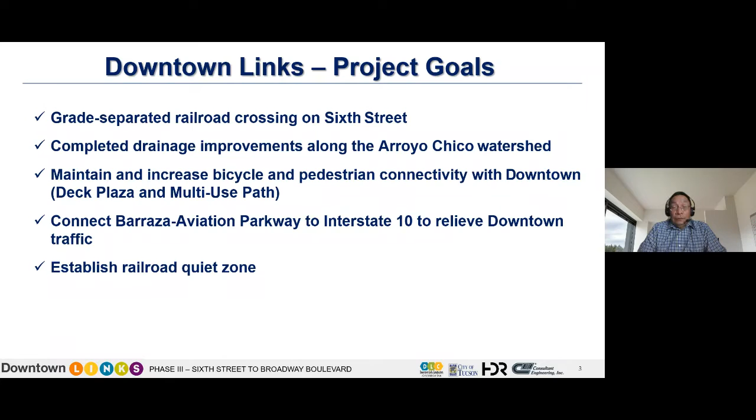maintain and increase bicycle and pedestrian connectivity with the downtown area, with the addition of a deck plaza and more multi-use paths, and then also to connect the Barraza Aviation Parkway to Interstate 10 to relieve the downtown area of traffic congestion. Also to work toward establishing a railroad quiet zone by improving several railroad crossings within the project limits.

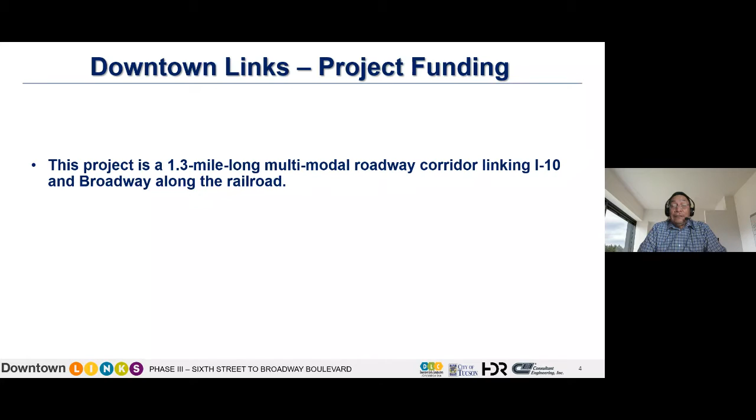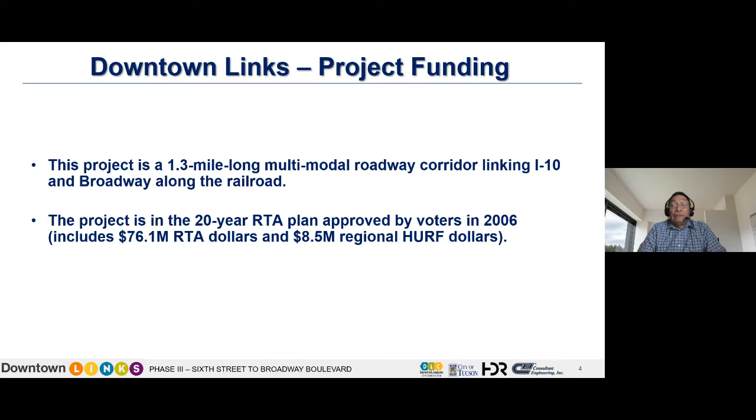Project funding. This project is a 1.3 mile multimodal roadway corridor linking I-10 and Broadway along the Union Pacific Railroad. This project is in the 20-year RTA plan approved by voters in 2006. This includes $76.1 million of RTA money and $8.5 million of regional HURF dollars. And with that, I will turn it over to our design project manager, Brent Kirkman.

Thanks, David. Yeah, HDR is very excited. We've been the city's engineering consultant for Downtown Links since its inception. And I'm going to give you just a brief summary of where we've been and where we're headed. If you were around back in 2012, that's when we completed phase 1 of Downtown Links. That was the 8th Street drainage project. That was a reconstruction of a major portion of the Arroyo Chico box culvert that goes through the 4th Avenue and 8th Street area just off of downtown.

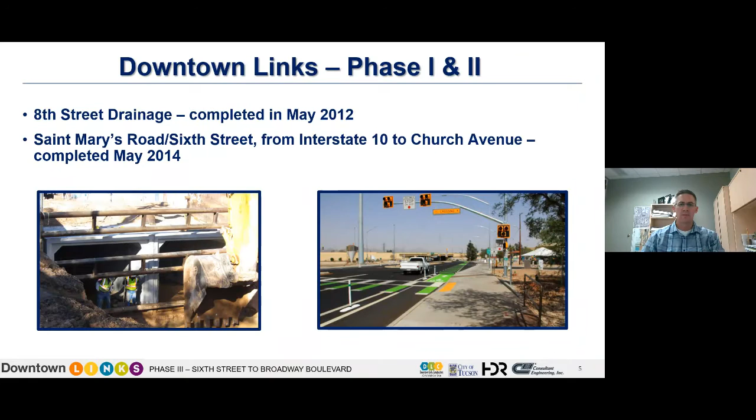Phase 2 was St. Mary's Road 6th Street, and that was really from I-10 down to Church Avenue. That was completed in 2014, and that added a median, added big separated bike lanes, some more drainage improvements, but that was phase 2 of the project. Where we're at now is construction of phase 3, and here's just a brief synopsis of those elements that you'll see constructed with this phase of the project.

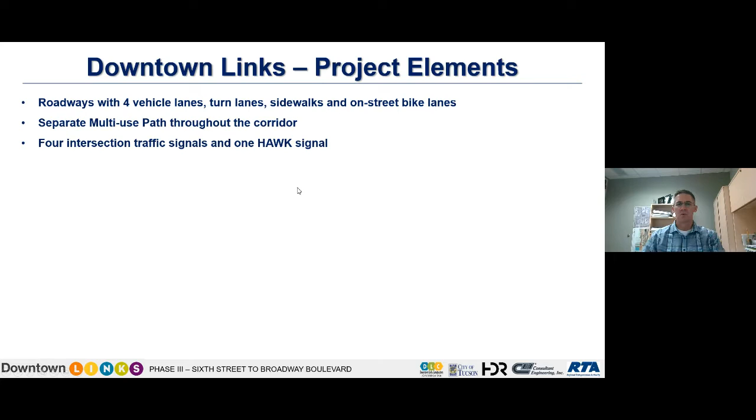6th Street will continue to be 4 lanes, and there's going to be a new 4-lane roadway connecting 6th Street down to Broadway. That's called Maclovio Barraza Parkway. There will be a separate multi-use path throughout the corridor. That's a separate path that'll be off the roadway. We're going to have 4 intersection signals. There's going to be several new signals, one at Church and one at the new Barraza Parkway and 6th Street intersection, and then also a brand new HAWK signal near 7th Avenue near a railroad crossing.

There's also going to be 4 new bridges. As Dave mentioned, it's grade separated, so the new 6th Street alignment is going to go underneath the railroad. So there's a new railroad bridge. 9th Avenue, there will be a bridge across there. We're calling that the Deck Plaza. I'll talk a little bit more about that in a minute.

The new Maclovio-Barraza Parkway, that's the road connecting 6th Street to Broadway at Aviation. That road's going to go up and over 6th Avenue, so there's a new overpass bridge there. And then there will also be a pedestrian only or a multi-use path pedestrian bridge that goes over Stone Avenue as well.

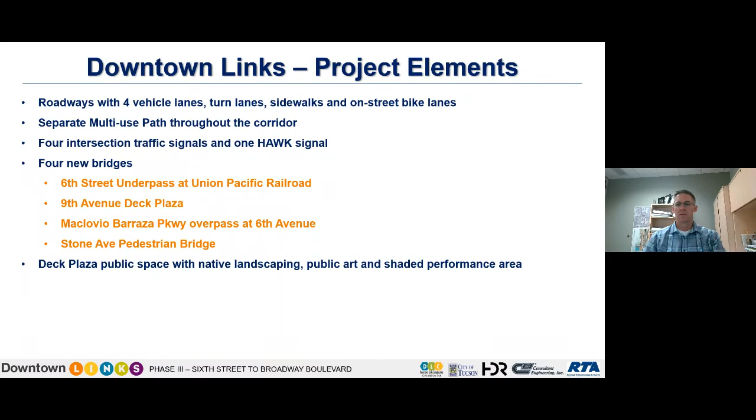The Deck Plaza, that's a public space area. It's going to have native landscaping, public art, performance areas, and that's going to be around that new bridge at 9th Avenue that goes over the new roadway underpass. Major drainage improvements. We're going to continue the work that was done in 8th Street. We're constructing about a half a mile of a very significant drainage culvert, and doing that allows us to remove a lot of the area from the floodplain.

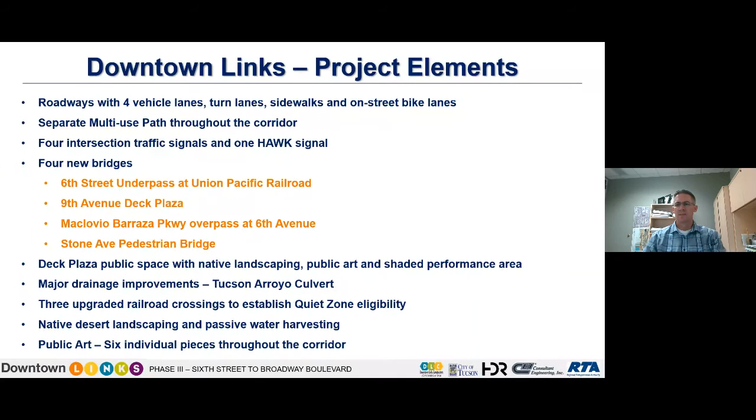We're going to have upgraded railroad crossings. I'll talk a little bit more about those in a minute as well. Native desert landscaping, passive water harvesting. Long term, it just reduces maintenance and overall cost. And then also public art. There will be 6 individual pieces spread throughout the project.

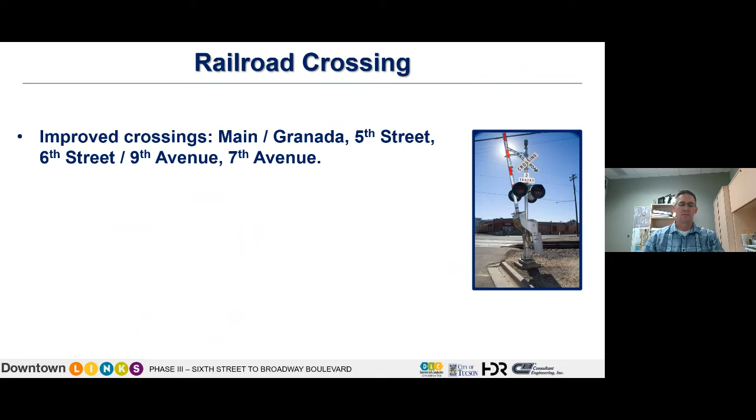Specific to the railroad crossings, there's actually 4 crossings. There's one at Main and Granada. There's one at 5th Street. There's one at 6th Street and 9th Avenue. Those are kind of 2 in the same, they're the same crossing. And then also 7th Avenue. We're going to be improving 5th Street, the 6th, 9th, and also 7th. And then Main Granada is going to be improved later as part of a bond project.

The quiet zone: once all those improvements have been made to those crossings, the city can apply for the quiet zone, and that'll start the process to get the train horns turned off through the downtown area. Okay, Main Granada, that's going to be part of the Prop 101 road recovery project.

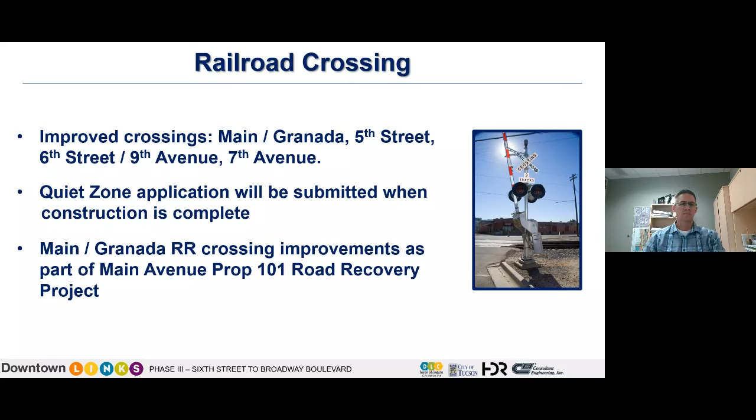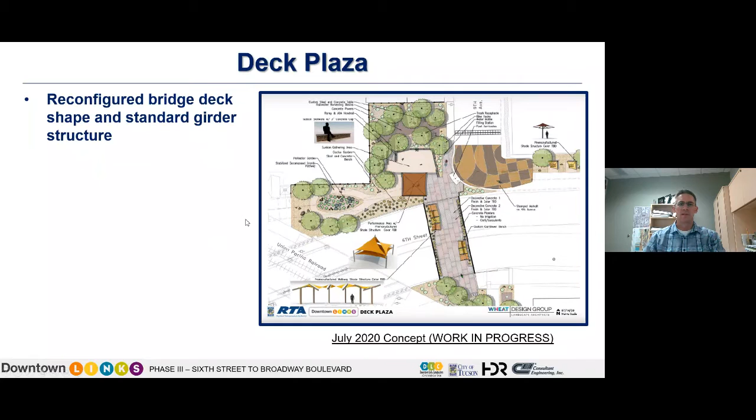And then this is the Deck Plaza. I think a lot of people are familiar with this area. Previously, the structure was a lot larger, and what we've done recently is we've reconfigured that. We've made it a 42-foot wide bridge. It's a standard girder bridge, more commonly what you would see going across any roadway. But for the reduction in the area that was on structure before, we have accounted by including that area off structure to the north, in the 9th Avenue cul-de-sac area, and then also along the MUP.

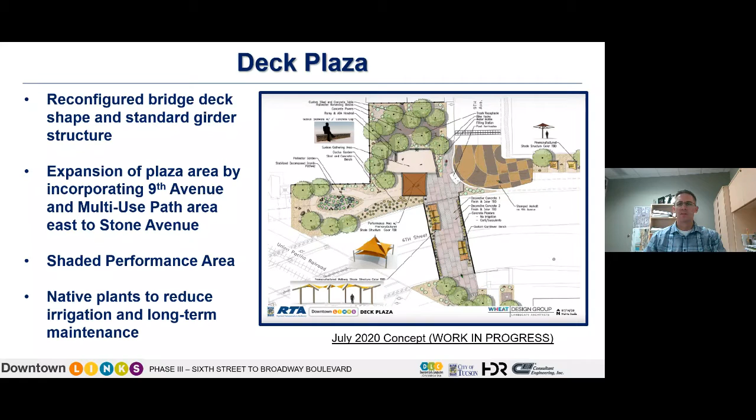There's a multi-use path between 9th Avenue and Stone Avenue on the north side of the road, and that area has been enhanced as well with additional features. There's going to be a large shaded performance area. And then again, we've gone to native plants to reduce long-term irrigation and maintenance needs. And there'll be 6 pieces of public art. Here's just 2 of the examples that were produced by the artists as part of their selection process. And there will be other individual art installations as well throughout the project.

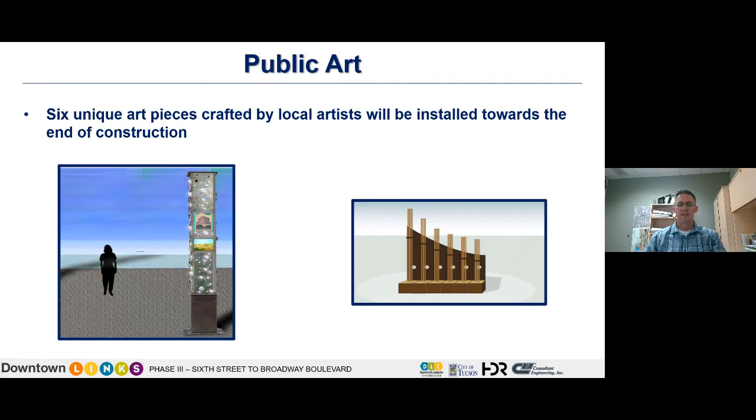And that wraps up my quick summary, and I'll pass it over to Austin Atterbury with Granite, and he's going to talk more about specifically the construction. Thanks, Brent. Good evening, everybody.

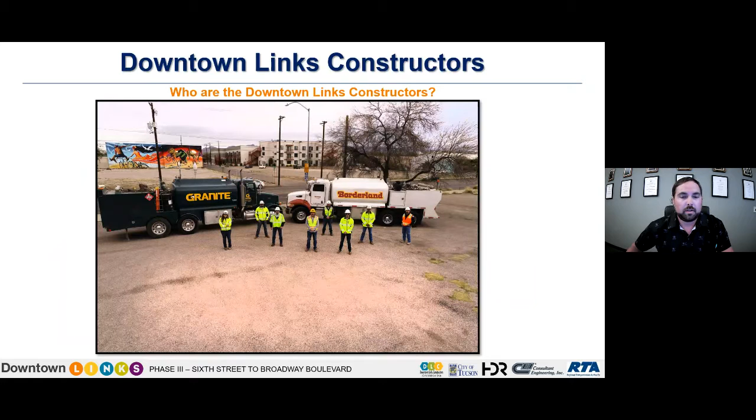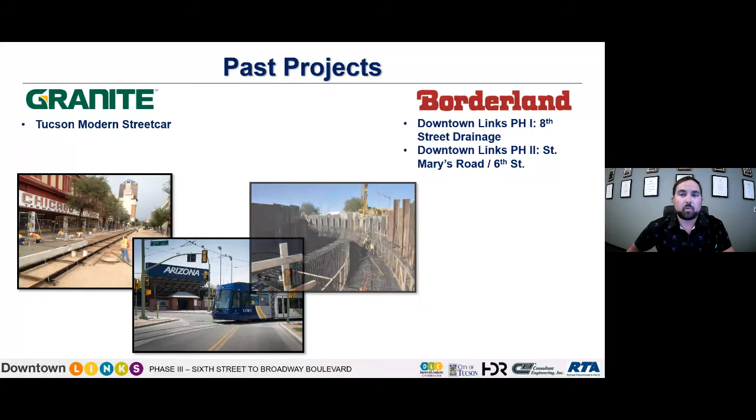I'd like to start off with a small introduction of who the Downtown Links Constructors are. It's a joint venture company created by 2 of the top contractors in the greater Tucson area, Granite Construction and Borderland Construction, which have joined forces and are really the backbone of the DLC. You may recognize our names, but I wanted to touch briefly on a couple projects: the Tucson Modern Streetcar that Granite completed in 2013, and the 2 prior phases of the Downtown Links project that Borderland completed in 2012 and 2014.

Overall, I'd like to help communicate the construction phasing throughout the project life cycle. We've broken the project into segments. Segment 1, the southern end of the project, south of Broadway, where we'll be modifying the existing Aviation Parkway to better align with the new Maclovio-Barraza Parkway. Segment 2 extends from Broadway to 6th Avenue. Segment 3, the new parkway alignment from 6th Avenue to Stone Avenue. Segment 4 includes the reconstruction of Stone Avenue with the new 6th Street alignment. Segment 5, the reconstruction of Church Avenue from 6th Street to Stone Avenue.

Segment 6, the intersection of 6th Avenue and 7th Street, as well as the new 6th Avenue overpass. Segment 7, the new 6th Street alignment east of the Union Pacific Railroad. Segment 8, which is the new 6th Street alignment west of the Union Pacific Railroad. And Segment 9, the intersection of Stone Avenue. Segments 10 and 11. Segment 10 is the intersection of 5th Street where it crosses over the Union Pacific Railroad. And segment 11, the intersection of 6th Avenue and 6th Street.

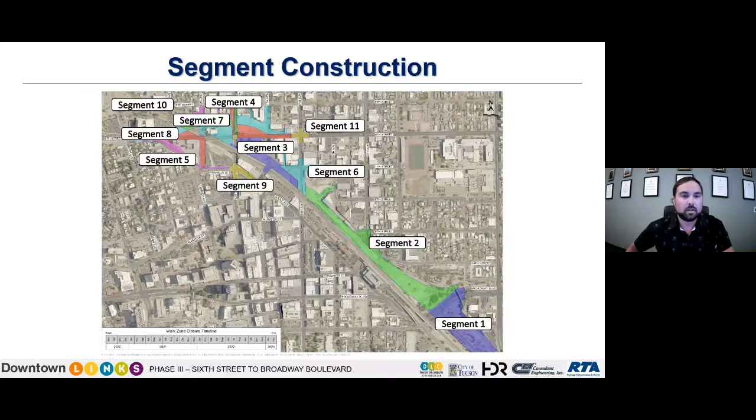Wanted to jump on and kind of provide a general project outline showing the phased construction approach with approximate dates for construction. One thing to keep in mind as we work through these next few slides is these are representative mainly of the roadway construction, and the utility infrastructure work will happen separately from the roadway construction, obviously ahead of it.

Start us off on August 24th, work in segment 2. Segment 2 will have little to no impact on the traveling public. Segment 2 has 5 retaining walls, storm drain improvements, utility upgrades. Segment 3 will be built utilizing a phased construction approach to minimize the impact on the traveling public. It also has 3 retaining walls, storm drain improvements, a large portion of the new box culvert upgrades, as well as the multi-use path. Segment 5 will also be constructed with a phased construction approach to minimize the impact, has 3 retaining walls, storm drain improvements, utility upgrades.

And then segment 9, which is the reconstruction of the Stone and Toole intersection with storm drain improvements and utility upgrades as well. These 4 segments will be built beginning August 24th and wrapping up approximately August of 2021.

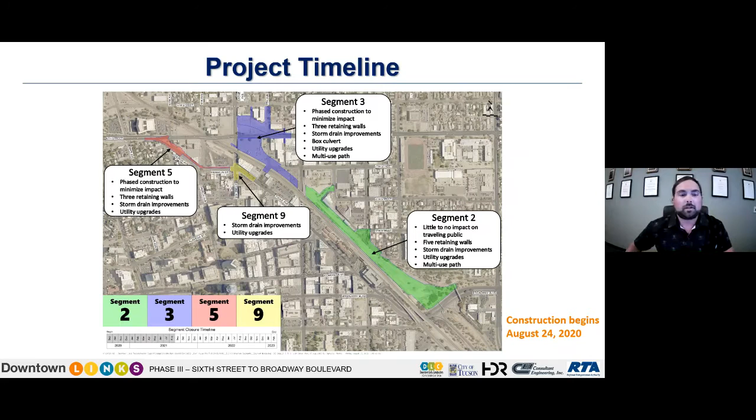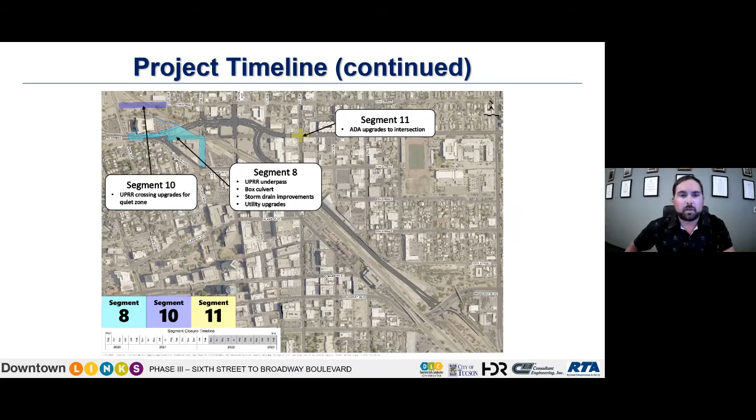The last phase of construction will be segments 8, 10, and 11. Segment 8 has the second UP underpass and new 6th Street alignment, the box culvert, as well as storm drain and utility upgrades. Segment 10 has necessary crossing upgrades to establish that quiet zone. And segment 11 really has ADA upgrades throughout the intersection to bring it in compliance. These last 3 segments will be constructed beginning March of 2022 and wrapping up approximately in February of 2023. Once we're all completed, we'll have a beautiful new parkway connecting existing Aviation up to Interstate 10.

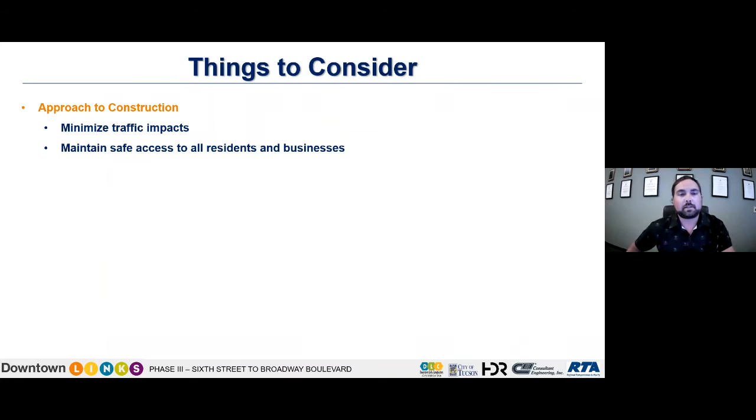So some things to consider while we approach the construction project and start our planning. The things we think of are how do we minimize traffic impacts? How do we maintain safe access to all residents and businesses, as well as bicyclists and pedestrians at all times? How do we minimize the speed reduction and temporary traffic control devices that are all kind of a nuisance throughout the construction process, as well as minimizing cut-through traffic on the residential streets for the residents and businesses in the area.

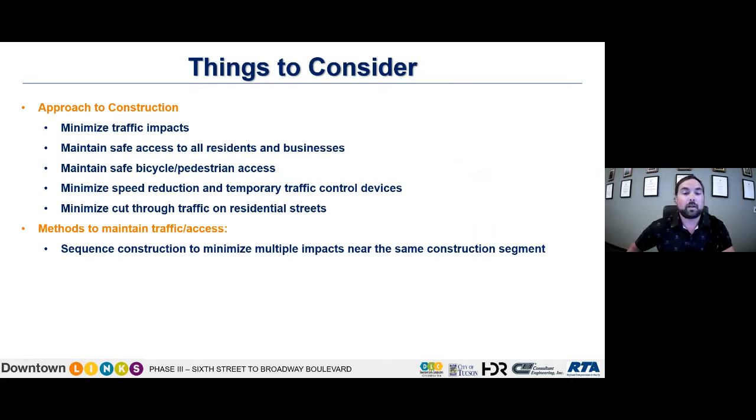To do that, some methods we use are we sequence construction to minimize multiple impacts near the same area of the project at the same time. We try to minimize the temporary traffic control and use pavement markings where we can to cut down on barricades and hazards in the roadway. We also utilize temporary lane shifts as well as temporary detours that will be paved.

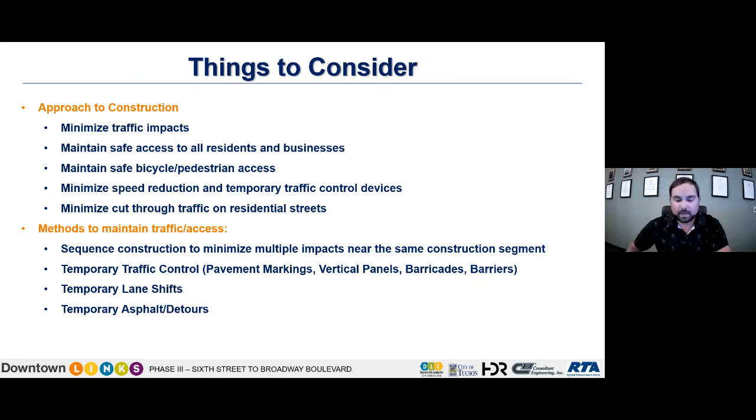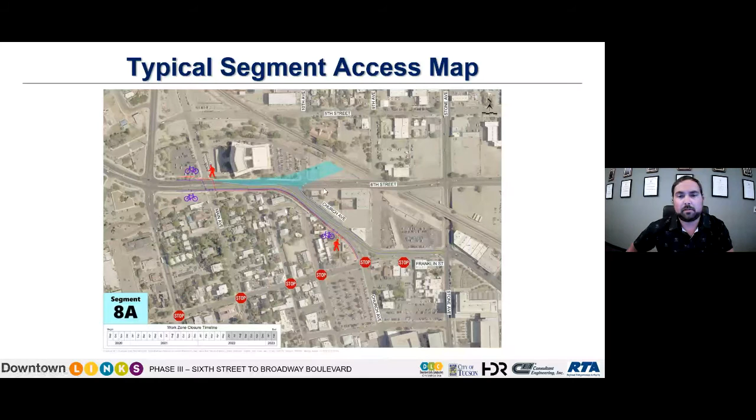This one here for segment 8 is a critical piece. This will be the detour that will be in place for a year and a half while the new underpass is constructed on the Union Pacific Railroad. This segment access map also identifies maintaining 2 ways of traffic throughout the construction segment. We'll be maintaining bike lanes and access as well as pedestrians.

But this one really dives into our approach on minimizing cut-through traffic. We think through this on every segment to really minimize that effect on the local residents and businesses. So our approach in this segment is to add additional stop signs at intersections adjacent to our work zone, which ultimately will take a person longer to get to where they're going if they choose to use cut-throughs versus staying within our construction zone that should flow smoothly.

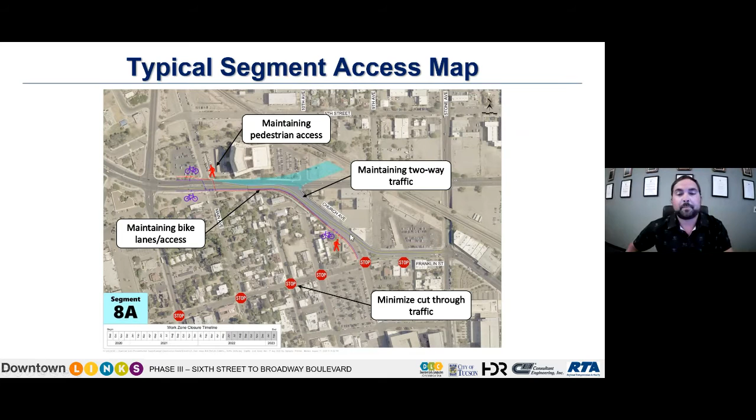If you are a local business in the area that is being affected by construction, feel free to reach out to the RTA Main Street Business Assistance. So again, thank you. And from here, we'll move on to questions.

All right, looks like question number 1 we have here is: Segment 2 borders Iron Horse Park, which is being redesigned by the neighbors. Are you working with the neighborhood association during this phase? I think I'll turn that question over to Brent. Yeah, thanks, Austin.

As of right now, the project is not. The project is designed to match into the right-of-way line. Wheat Design Group, though, is working with the city, and they are coordinating. Wheat Design Group is the landscape architect for the project. They are working with the city and with Parks to work on the Iron Horse neighborhood and the Iron Horse Park area. And you could reach out to the city, I'm sure, for more information on that.

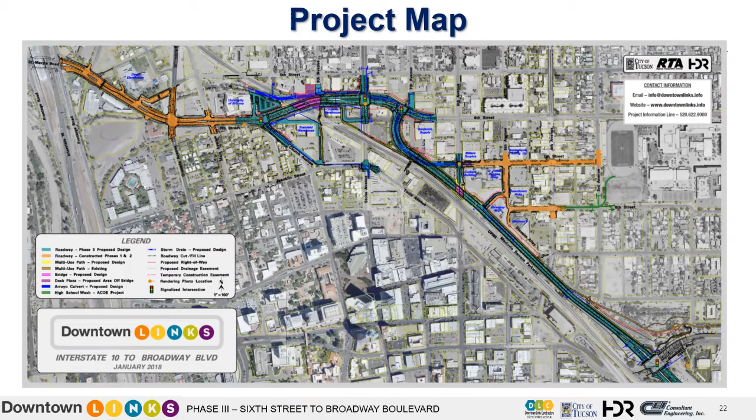Thank you, Robin. Moving on, the next question: 6th Street will be closed at Church for 1.5 years? Yes, approximately 1.5 years. The new 6th Street alignment goes underneath the Union Pacific Railroad, just north of the existing alignment. In order to construct that new underpass, we have to temporarily relocate the Union Pacific Railroad to the west side in a temporary configuration. In doing so, we are not able to provide a crossing, but there will be a detour along Church Avenue to Stone Avenue, back up to the 6th Street alignment. The Church Avenue detour will look much different than it does today, and should be a smooth transition throughout that segment.

All right, moving on here. Is there a bridge that goes over the road at 6th and Stone? There is a bridge going over Stone Avenue north of the Union Pacific Railroad, south of 6th Street. It is a pedestrian bridge that connects the multi-use path from one side of Stone Avenue to the other. So yes, there is a bridge there.

Next question, what will the detour be during the closure of 6th Street at Church? For the closure of 6th Street for the new Union Pacific underpass, the detour will be from existing 6th Street south on Church Avenue to Stone Avenue, and then north on Stone Avenue back to the 6th Street alignment. That will be the detour during the underpass construction.

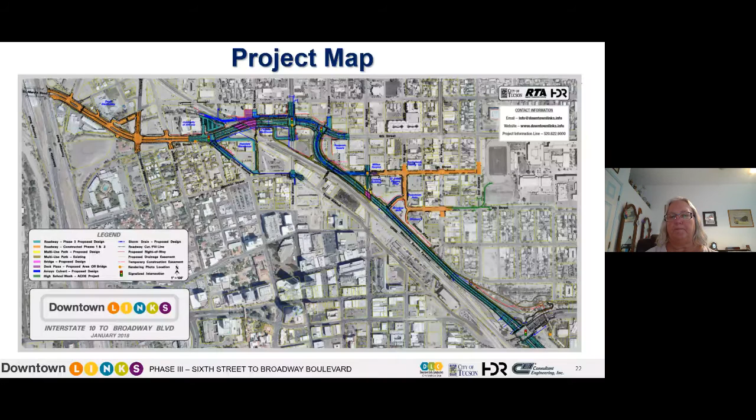Thank you, Rob. All right, moving on here. Another question. When are they closing 6th Street? So right now, 6th Street will be closed once segment 5 is complete. Again, segment 5 is Church Avenue from 6th to Stone, which should wrap up in March of 2021. There are a few things that are outside of our control with regards to the Union Pacific and the underpass there, but right now it's looking like early to mid 2021 for 6th Street closure.

All right, moving on here. Says, thanks, Diana. Can you have someone look into installing a crosswalk on the north side of Stone and Franklin that doesn't necessarily meet ADA? I think there are exemptions to meeting ADA for existing grades. So unfortunately, we cannot. We would have to be able to meet ADA on the north side. I've asked the same question. So there have been other conversations about what else we could do. So I want to say that it is something that we tried to build in and have as part of this, but unfortunately, we couldn't do it in this.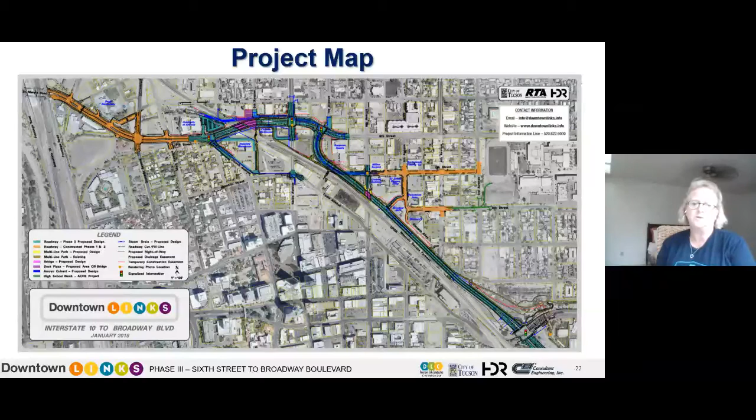So I can talk with you, Chris, about some of the ideas of what we have about how we can build in some pedestrian improvements on the north side. But unfortunately, we didn't have the ability to do it. And I cannot throw a crosswalk up unless it meets federal requirements. Thank you, Diana. Moving on here.

Is there a way to have an email sent when pedestrian and bike access changes surrounding neighborhoods versus navigating the website? I think the easiest way to stay up to date with the project and the closures and the access would be to sign up for the email blast that you can do from downtownlinks.info. Those will more than likely be coming out weekly or as significant changes occur throughout the project. And in those emails will be the documents explaining what the access will be.

Moving on here to the next question. What happens in the contract if there are big problems with Union Pacific and cost overruns? We have agreements in place for Union Pacific. Oh, am I on? We have agreements in place with the Union Pacific that guarantee certain prices that they would not go above. And we've already worked out all of the issues with Union Pacific.

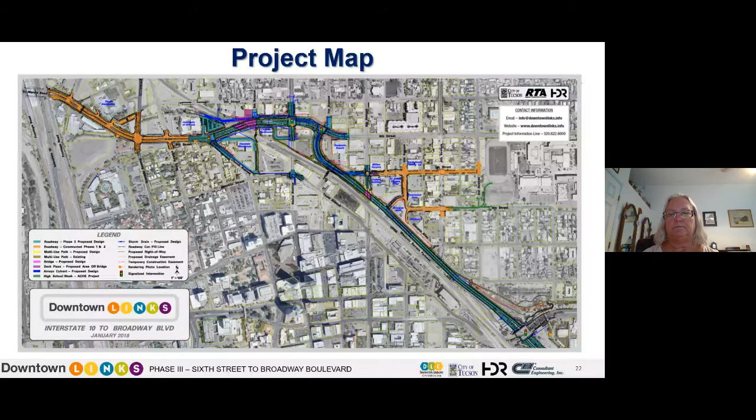So cost overruns, as would be natural with a regular construction project, we'd handle with the contingency that's built into the funding situation. The other thing to be aware of is this is a construction manager at risk contract, which means that a lot more exploration has been done by the contractors. And that means that there are unlikely to be very many cost overruns. Thank you, Robin.

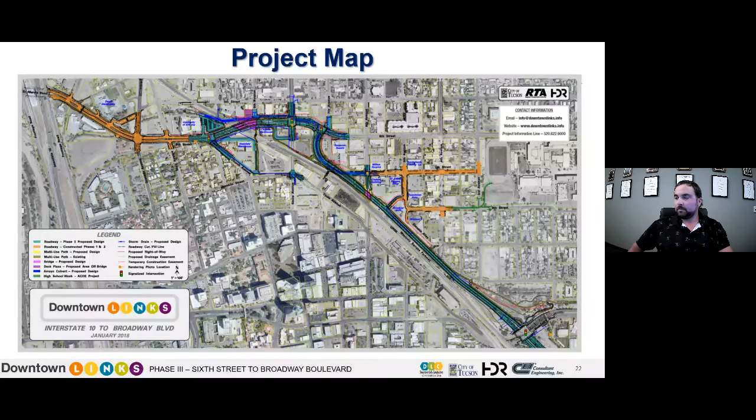I'd like to take this opportunity to thank everybody for attending the pre-construction open house. Appreciate your participation, and we will follow up on the questions that we didn't have complete answers to. And we will definitely reach out to the neighborhood associations to make sure that we are meeting your needs. And definitely we'll follow up with the Iron Horse Park planning group there. We have met with them once, and our landscape architect is the same one that's doing their work as well.